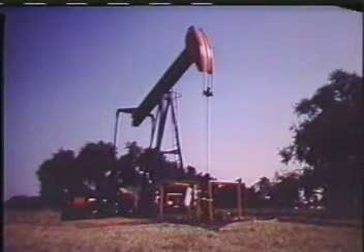Crude oil. It starts out here in the ground, formed by organic materials that have been compressed under the Earth's surface for millions of years, and ends up here, powering cars, trucks, ships, and airplanes. And here, heating houses, churches, schools, and office buildings. And even here, in clothes, solvents, plastics, and chemicals.

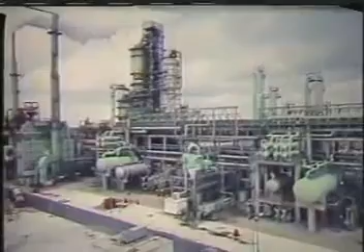But to get to all of these places, the crude must first be pumped, piped, processed, and refined. This program is about one of the processes, catalytic cracking, that changes oil into products we can use.

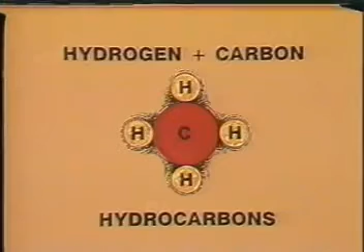To understand and appreciate the catalytic cracking process, you need to know how crude oil is structured. Crude oil is made up of hydrogen and carbon atoms that have bonded together to form molecules called hydrocarbons. The hydrocarbons found in crude come in a variety of shapes and sizes, ranging from small, simple compounds to large, complex molecules.

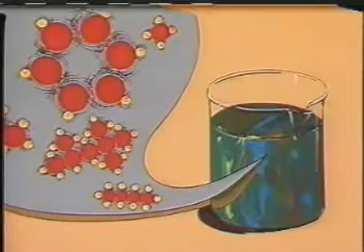Different types of hydrocarbons have different characteristics. Small or light hydrocarbons, like methane and propane, are easy to ignite, so they make good fuels. Heavy hydrocarbons, like dodecane, are thick or viscous, which makes them ideal lubricating oils.

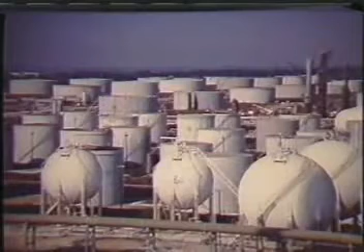The goal in most refinery operations is to maximize the production of light hydrocarbons because they can be used in products like gasoline and petrochemical feedstocks that sell for the highest prices. Catalytic cracking helps us to meet this goal by converting heavy hydrocarbons into smaller, more useful molecules.

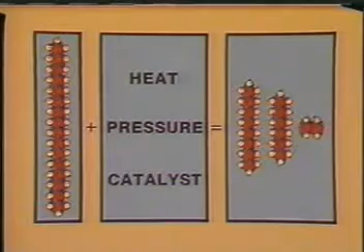The cracking of hydrocarbons is accomplished by a chemical reaction that uses heat, moderate pressure, and a catalyst to break down the molecules. The catalyst is a substance that promotes the cracking of oil. When the reaction is complete, the catalyst comes out just like it went in, except for some hydrocarbons and coke that are deposited on its surface. The catalyst can then be cleaned and reused.

Heat is an essential part of the process. It is the source of energy that keeps the cracking reaction going. Temperature in the cat cracking vessel is usually in the area of 900 degrees Fahrenheit.

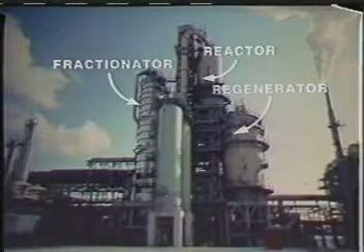A cat cracking unit consists of three major sections, or parts: the reactor, the regenerator, and the fractionator. Let's take a step-by-step look at how the whole process works.

The cat cracker feed is usually a heavy gas oil or a vacuum gas oil. Normally, the first step in processing is to preheat the feed in a furnace or a series of heat exchangers.

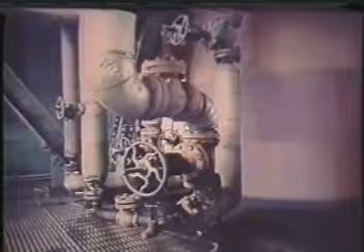Next, the feed is mixed with hot catalyst in a line called a riser. The heat from the catalyst vaporizes the oil as it enters the riser, and cracking begins as soon as the catalyst makes contact with the oil vapors.

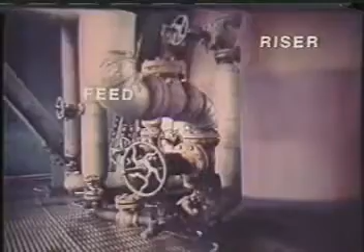The oil vapors fluidize the catalyst, allowing the mixture to flow up the riser into the reactor. By this time, most of the desired cracking reactions have already occurred, so the catalyst and oil vapors are usually separated as soon as they enter the reactor. Sometimes, however, the separation is purposely delayed so that further cracking will occur.

The catalyst is separated from the oil vapors by passing the mixture through cyclones located inside the reactor. As the oil vapors and catalyst swirl through the cyclones, catalyst particles are deposited on the cyclone walls. These particles slide down to the bottom of the reactor, while the cracked oil vapors flow out the top and are sent to a fractionating tower.

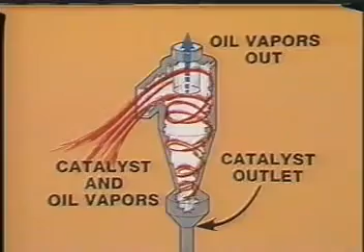In the fractionating tower, the hydrocarbons are separated by their respective boiling points into products such as gas, gasoline, naphtha, light and heavy cycle oils, and slurry oil. This separation process is known as distillation. The bottom product, or slurry oil,

contains catalyst particles that are carried over from the reactor. This stream is sent to a slurry settler, where the catalyst settles out. Catalyst and oil from the bottom of the settler are then mixed with fresh feed and recycled back through the system. This is called a slurry recycle.

Let's return to the reactor. We said that hydrocarbons and coke are deposited on the catalyst during the cracking reaction. These deposits deactivate the catalyst, so they must be removed before the catalyst is reused. Two different methods are used to clean or regenerate the catalyst.

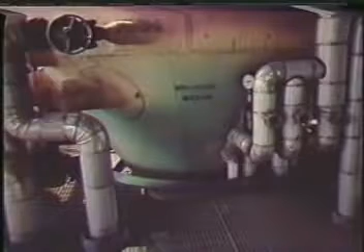The first step in regeneration is to pass the spent catalyst through a steam stripper. The steam removes hydrocarbons from the surface of the catalyst by vaporizing them. The vapors are then channeled back to the reactor.

Next, the catalyst flows into the regenerator. Combustion air is intentionally added to this vessel to burn the coke off the catalyst. The burning of coke produces a flue gas and also releases a great deal of heat. Before leaving the regenerator, the gases pass through another set of cyclones to separate out any catalyst particles that are carried with them.

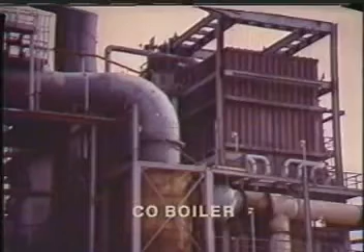From the regenerator, the flue gas may be sent to a CO boiler. The CO boiler burns carbon monoxide in the flue gas into relatively harmless carbon dioxide.

Sometimes the flue gas is passed through an electrostatic precipitator to recover small particles of catalyst. The catalyst particles are given an electrical charge, which causes them to collect on plates inside the precipitator.

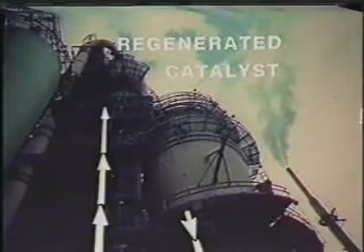Back in the regenerator, the catalyst is ready for reuse after the coke has been burned off it. The regenerated catalyst is mixed with fresh feed, and the same basic process repeats itself. Much of the energy needed to continue the reaction is provided by the catalyst, which has absorbed heat during the regeneration stage.

You can see that the catalyst circulates continuously throughout the system, from the riser, up to the reactor, across to the regenerator, then back to the riser. The catalyst flows in a cycle from one part of the system to the next.

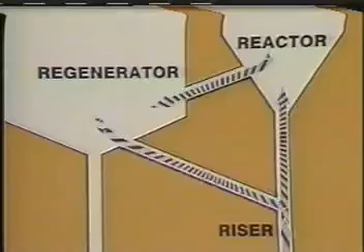Let's review how the cracking process works and consider in more detail some of the factors that affect this process. Stop the tape and turn to Workbook Period 1.

In the first part of the program, we looked at the various components that make up the cat cracking unit and considered the function of each of these components in relation to the total process. In this section, we'll discuss the operating conditions or variables that affect cat cracker yields and look at how these factors are controlled.

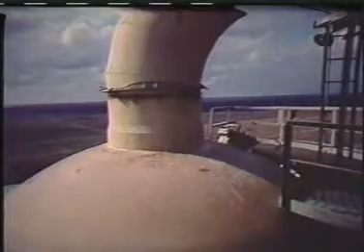You already learned that the goal in cat cracking is to convert heavy hydrocarbons into lighter, more useful molecules. To determine how much cracking occurs in a unit, we use a measure called conversion. Conversion tells us what percent of the feed has been cracked into material that boils below 430 degrees Fahrenheit.

The boiling temperature of the cat cracker feed ranges from around 600 degrees Fahrenheit to 1,000 degrees Fahrenheit. So cat cracker products that boil below 430 degrees Fahrenheit must be composed of hydrocarbons that have been broken down from larger molecules.

Conversion is normally calculated by measuring the yield of products that boil above 430 degrees Fahrenheit and then subtracting this figure from 100. In this example, 40% of the cat cracking products boil above 430 degrees Fahrenheit, so the percent conversion is 100 minus 40, or 60%.

There are a number of factors or variables that affect conversion in the catalytic cracking process. One important factor is the type of catalyst that's used. Different catalysts produce a different range of products.

Some catalysts maximize the production of high-octane gasoline. Others increase the yield of jet fuel. The term catalyst selectivity is used to describe the product distribution that can be realized from a given catalyst.

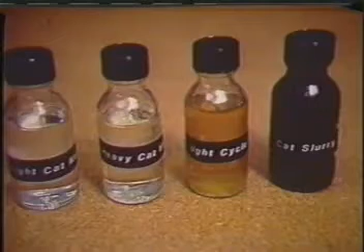The ability of the catalyst to actually convert the feed into lighter products is called the catalyst activity. The more active the catalyst, the higher the rate of conversion.

High regenerator temperatures or contaminants in the feed can gradually reduce the catalyst activity and selectivity. Fresh catalyst is added as needed to maintain the desired activity and selectivity, and also to make up for catalyst losses in the flue gas and fractionator bottoms.

Another important operating variable is the catalyst circulation rate. Catalyst circulation can be measured by two different methods. The first is called weight hourly space velocity.

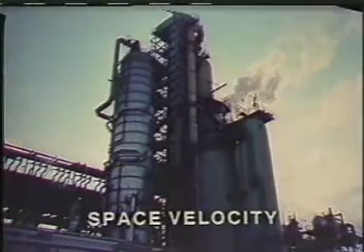The space velocity is determined by dividing the pounds per hour of feed charged to the unit by the total pounds of catalyst held up in the reactor. The space velocity is usually changed by adjusting the catalyst level or holdup in the reactor.

When the catalyst inventory in the reactor is increased, there is a corresponding increase in conversion. This, however, may not be desirable, because increasing the contact time between the oil and the catalyst often leads to overcracking. When the oil is overcracked, less gasoline is produced in return for higher gas and coke yields.

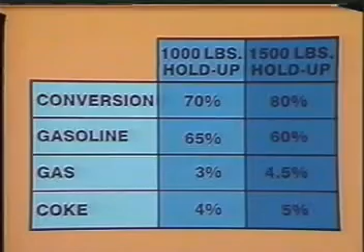The majority of cat cracking units in operation today are pure riser crackers. In these units, a bed of catalyst is not maintained in the reactor, so space velocity, or holdup, is not a relevant factor. Instead, the catalyst circulation is determined by measuring the catalyst-to-oil ratio.

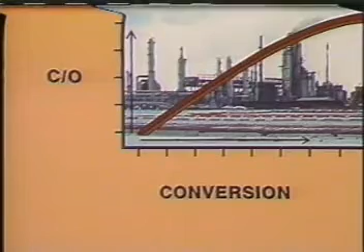The catalyst-to-oil ratio is simply the catalyst rate divided by the feed rate. As more catalyst is circulated through the system, the catalyst-to-oil ratio increases. You can see from the graph that conversion increases as the catalyst-to-oil ratio rises.

A third operating variable is the reactor temperature. The temperature in the reactor is controlled by adjusting the feed temperature, by changing the amount of bottom product recycled, or by changing the catalyst circulation rate.

This chart shows the relationship between reactor temperature and conversion. Generally, high reactor temperatures are desirable because they increase the gasoline yield and octane number.

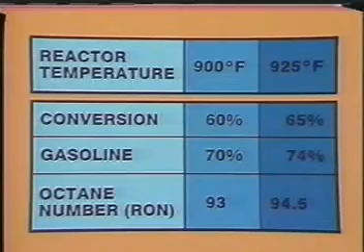A fourth operating variable is the regenerator temperature. The regenerator temperature is a function of several other variables, such as the amount of coke on the spent catalyst, the degree to which carbon monoxide is combusted to carbon dioxide, the catalyst circulation rate through the regenerator, and the amount of air supplied by the air blower.

High regenerator temperatures are often maintained because they reduce the amount of coke on the regenerated catalyst. The high regenerator temperatures also increase the amount of heat that the catalyst absorbs, so less catalyst can be circulated to meet the process heat requirements.

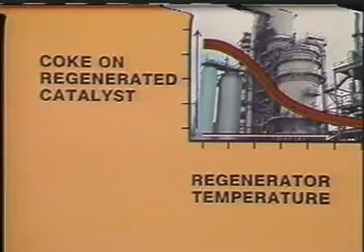The amount of coke that remains on the regenerated catalyst is also considered an operating variable. This is because coke deactivates the catalyst. Conversion decreases as the amount of coke on the regenerated catalyst increases.

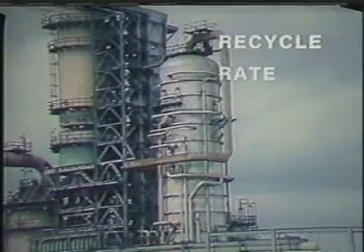Another variable that affects yields is the amount of bottom product that is returned to the reactor from the fractionator. This variable is called the recycle rate. Increasing the amount of recycle results in higher conversion and greater yields of gasoline and coke. In most operations, however, a low recycle rate is used because of the problems caused by the coke.

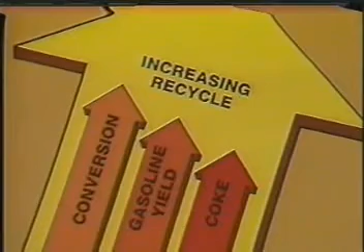The feed preheat temperature is also a factor that affects the unit operation. Raising the feed temperature means that less heat is needed from the catalyst, so the catalyst circulation rate can be reduced. This reduces the coke yield and increases the unit's capacity to process feed. The maximum feed preheat temperature is normally around 800 degrees Fahrenheit. Temperatures higher than this will cause thermal cracking inside the heater.

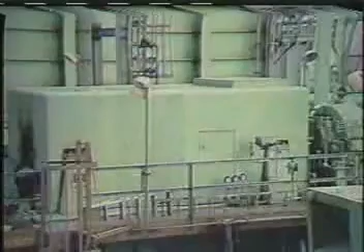The air to the regenerator is another operating variable. The burning air rate is set by the amount of coke produced. Enough air must be added to the regenerator to burn the coke off the catalyst. But if too much air is added, excessive burning will cause high regenerator temperatures.

Pressure in the reactor and the regenerator must be controlled to maintain the proper catalyst circulation. These variables, however, have little effect on product yields, so they are normally not adjusted to influence conversion.

The composition of the feed affects what types of products a particular unit will produce. This is because different types of hydrocarbons crack in different ways. By carefully analyzing the feed, we are able to predict the product yields.

Most variables in the cat cracking process are measured, recorded, and controlled with automatic instruments. This allows an operator to monitor and adjust the process from a central control room. Let's take a look at a simple example of how this instrumentation works.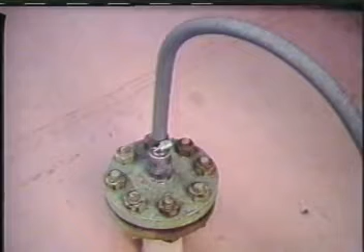Suppose the variable we are controlling is the reactor temperature. A measuring instrument, like this thermocouple, is used to sense the temperature inside the reactor. This measurement information on reactor temperature is then sent to a device called a controller that is located in the control room. The controller is programmed to keep the reactor temperature at a desired value called set point.

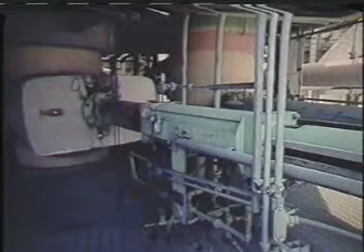If the temperature has deviated from set point, the controller sends a signal to a valve on the regenerated catalyst line, telling it either to open or close. This changes the amount of hot catalyst entering the riser and brings the reactor temperature back to set point.

During normal operations, the instrumentation automatically adjusts the process variables to keep the unit running smoothly. If it is necessary to change the condition of a process variable, an operator can adjust the set point value at the control board.

Let's review the operating variables in the cat cracking process and take a closer look at how the system is controlled. Stop the tape and turn to Workbook Period 2.

In the normal operation of a catalytic cracking unit, an operator makes minor adjustments to the process to keep the conversion rates at the desired value. These adjustments are for the most part routine, so when the unit is operating normally, it is fairly easy to control.

An operator is faced with a greater challenge when the unit is operating abnormally. There may be several different reasons for abnormal operations, so an operator must develop troubleshooting skills to identify and solve these types of problems. In this part of the program, we'll take a look at what causes some of these abnormal operating situations and how they affect the system. In the workbook period, we'll talk about the corrective actions that should be taken for each of these problems.

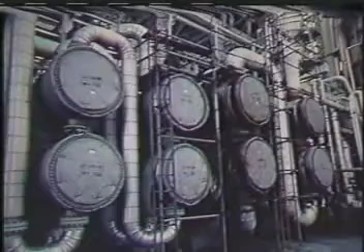The feed is usually preheated in a furnace or heat exchanger so that it will thoroughly vaporize when it's mixed with the catalyst. There are a number of problems that can cause a reduction or loss of the feed preheat. These include a failure in the instrumentation system, a cutoff of the fuel or steam supply, ruptured or fouled tubes in the furnace or heat exchanger, and water in the feed.

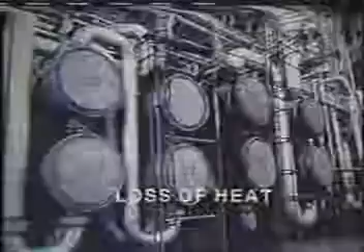When the feed preheat is reduced or lost, there may not be enough heat to vaporize the oil in the riser. If this occurs, a mixture of liquid hydrocarbon and catalyst may muddy up the riser and force the unit to be shut down and cleaned out.

Another abnormal situation is afterburning in the regenerator. Air is added to the regenerator to burn coke off the catalyst, but if too much air is available, the flue gas may also combust. This uncontrolled burning of flue gas is called afterburning. The primary symptoms of afterburning are a sudden increase in regenerator temperature and pressure. These high temperatures can damage the catalyst, the cyclones, and other metal hardware inside the regenerator.

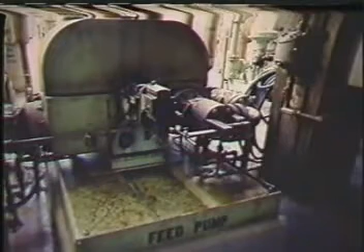A feed or charge pump is responsible for moving oil into the unit. A loss of power or a mechanical problem may cause this pump to fail. If the feed pump fails, the flow of oil to the unit will stop, and without oil vapors flowing up the riser, the catalyst will not be able to circulate properly. As a result, the reactor temperature, pressure, and catalyst level will rapidly decrease. Obviously, normal operation of the unit cannot continue without a source of feed.

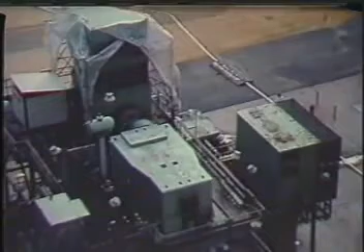An air blower provides combustion air to the regenerator. A failure of this component may be caused by a mechanical problem or a loss of steam or electrical power. If the air blower fails, it will not be possible to burn carbon off the catalyst, so there will be a sudden decrease in the regenerator temperature and pressure. This will reduce the differential pressure across the regenerated catalyst valve. Since the oil cannot be cracked with a spent catalyst, the unit will have to be shut down unless the situation is corrected.

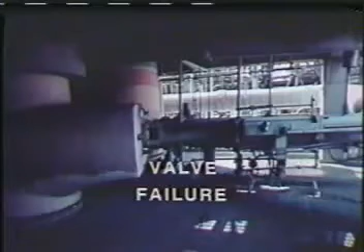Another condition that will cause the unit to operate abnormally is a failure of one of the valves that control the flow of flue gas, spent catalyst, or regenerated catalyst. A valve failure can result from problems in the instrumentation system, such as a controller malfunction or a loss of hydraulic fluid pressure, or the valve may fail because of mechanical problems within the valve itself.

The flue gas valve controls the regenerator pressure by regulating the flow of flue gas out of this vessel. If this valve fails, the regenerator pressure may change suddenly. This could result in a loss of differential pressure across the regenerated catalyst valve or the spent catalyst valve and lead to a flow reversal.

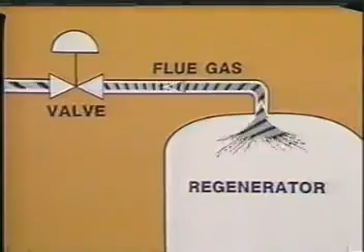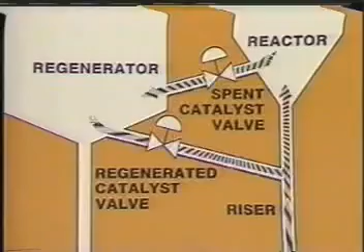An equally serious situation will occur if either the spent catalyst valve or the regenerated catalyst valve fails. A failure in one of these valves throws the whole system out of balance. The problem must be immediately corrected to prevent a major upset and possible flow reversal.

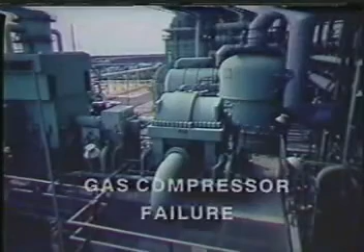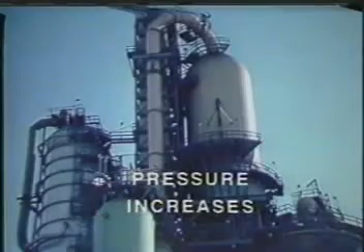Gases in the fractionator and the reactor are removed by a gas compressor. A loss of power or a mechanical problem can cause the compressor to lose some or all of its capacity to compress gases. If this happens, there will be a sudden increase in fractionator and reactor pressures. This interferes with fractionating efficiency and limits the amount of feed that can be processed through the cat cracker. It also changes the differential pressure that exists across the spent and regenerated catalyst valves.

Another situation that will cause a major upset is a loss of power. A power loss is usually due to problems outside an operator's control, such as an accident, lightning, or a short at a junction box. In the event of a power failure, electrically driven pumps, compressors, instruments, and valves will fail. Unless a backup power system is available, a loss of power means that the unit must be shut down.

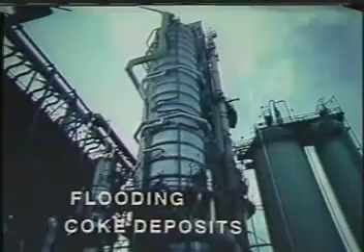Problems in the fractionator can also cause a cat-cracking unit to operate abnormally. For example, if a fractionator becomes flooded with liquid hydrocarbons, there will be pressure surges inside this vessel. These pressure surges will back up into the reactor and cause it to operate erratically. Sometimes the outlets at the bottom of a fractionator will become plugged with coke deposits. If this happens, product cannot be drawn from the tower, so the unit must be shut down and the deposits cleaned out.

Let's review the causes and effects of abnormal operating problems and consider the corrective actions that should be taken for each of these situations. Stop the tape and turn to Workbook Period 3.

You learned that the purpose of catalytic cracking is to convert heavy hydrocarbons into smaller, more useful molecules. We showed you the hardware that is used to do this job and discussed how each piece of equipment works. Then we introduced you to the major operating variables in the cat cracking process and talked about how these operating conditions affect product yields and conversion. Finally, we looked at a number of abnormal operating situations, such as an air blower failure or a loss of the feed preheat, and discussed the symptoms and solutions for each of these problems. This concludes our program on catalytic cracking.